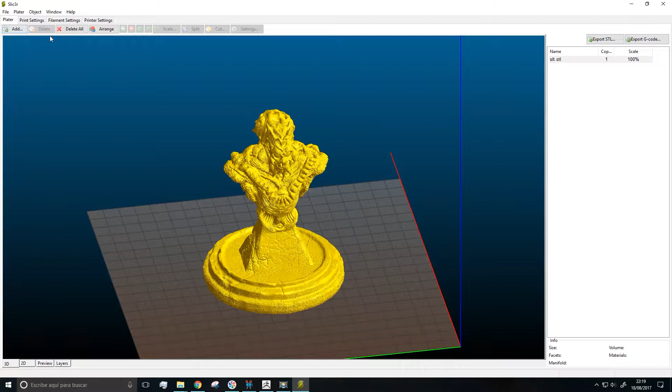So I opened up the model, and here you'll find the print settings. It's better if you know how to adjust these parameters in order to get a good result.

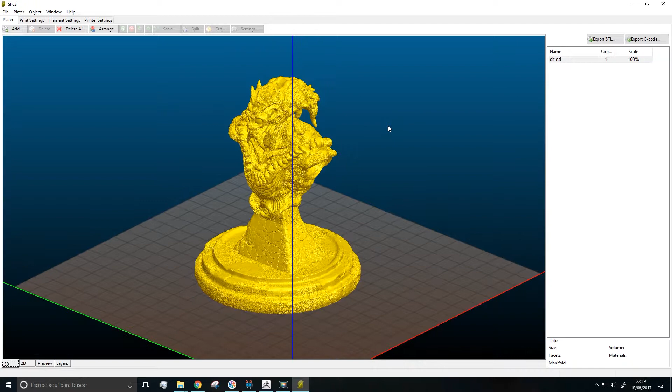However, as I just said, you probably won't need to know all this stuff, since the models are usually printed by professionals or experts. So if I click on Preview, we can see that the definition is quite low, so we should increase it.

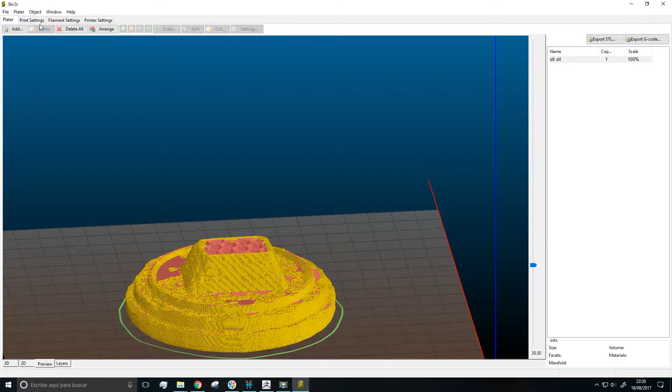Apart from these details, the object can be printed. So first the base, then the superior part of the base. Some areas need to be fixed from the print settings, filament settings, and printer settings tabs, okay? All these.

Perhaps it's better if we open another model, so I'll close it, because I think a simpler model is better. Also, the software runs very slow, so I'm gonna open it again.

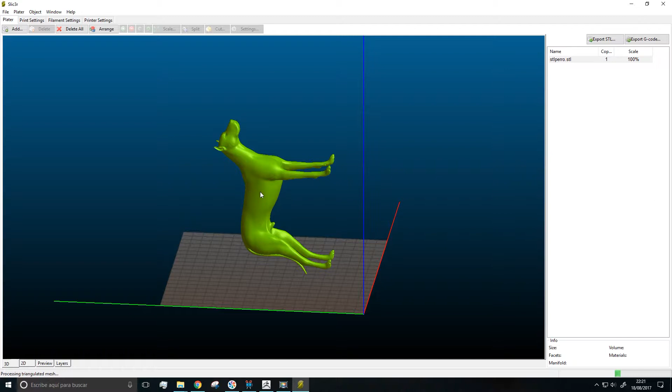Okay, I'm gonna select this one. This is the default model of ZBrush. To rotate it, just right-click and press Rotate around X-axis. 90, for example. Oops, again. And this time 180.

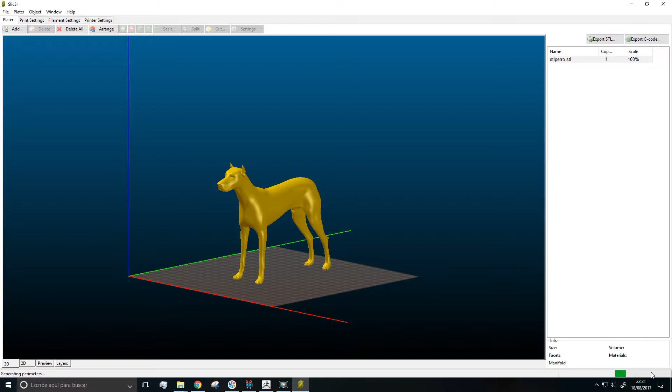Now wait until this green bar at the right bottom is fully loaded. Otherwise, we won't be able to work properly. Okay, so we need to wait.

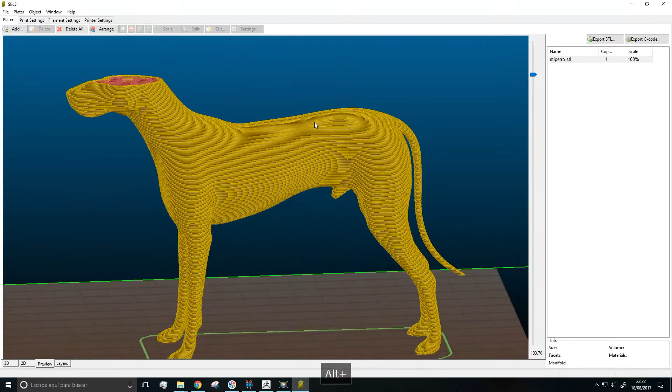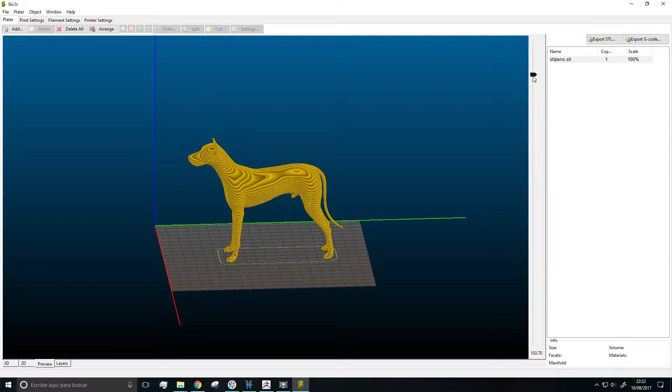If we go to Print Settings, we could increase the general size, the infill. We can also change the shape. If I set the fill density at 40 and choose honeycomb option for fill pattern, okay, let's see what happens. See, it has a honeycomb shape.

So this shape can be modified from the print settings. Let's choose octagram spiral. Great, and this is the infill shape.

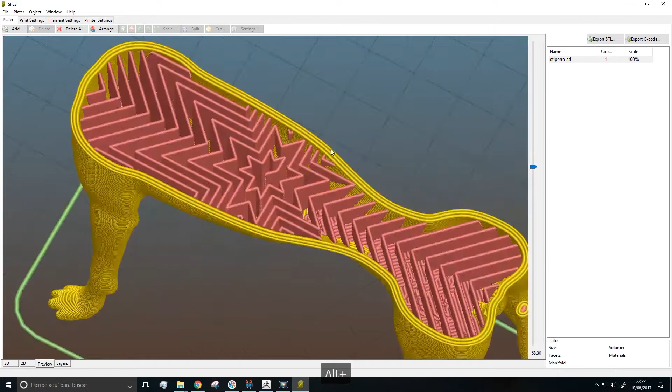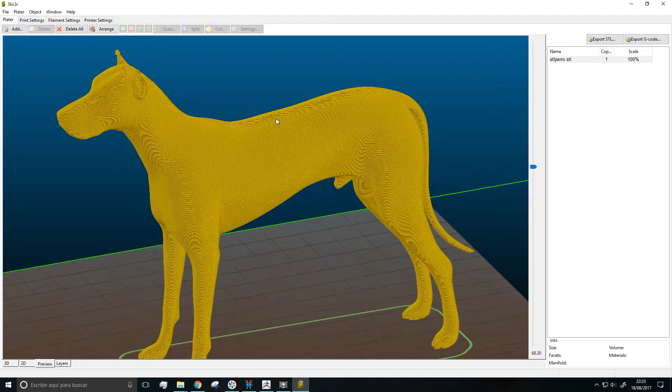We can apply these parameters to our own models to get a good printed version. Let's choose now 3D honeycomb, for instance. See, the number of layers is also relevant here, because this print software works with layers, although there may be other ways.

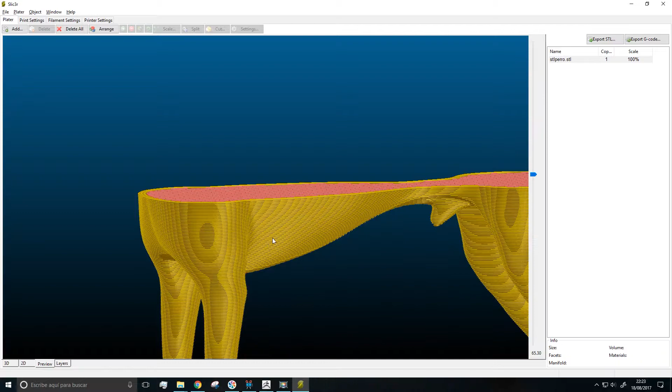See, these are the layers, so these layers can be modified. Obviously, the more detail, the more slowed down the program will run, okay?

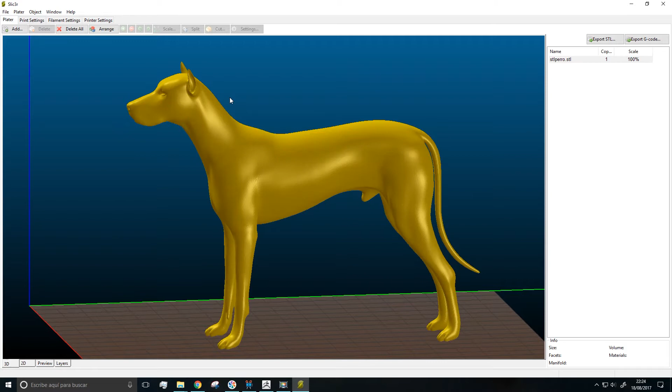Also, when the model is selected, it turns to green. It can also be scaled, okay? For example, let's set it to 150. See?